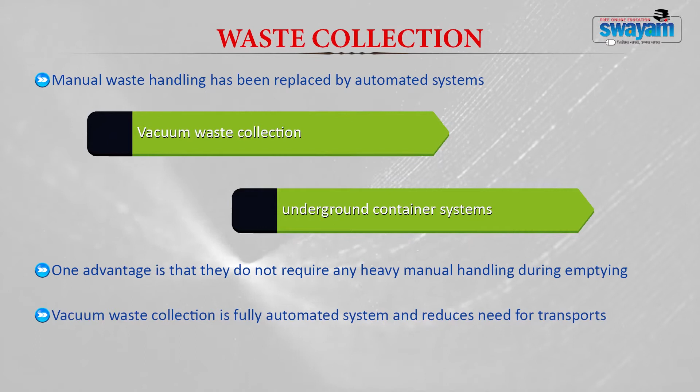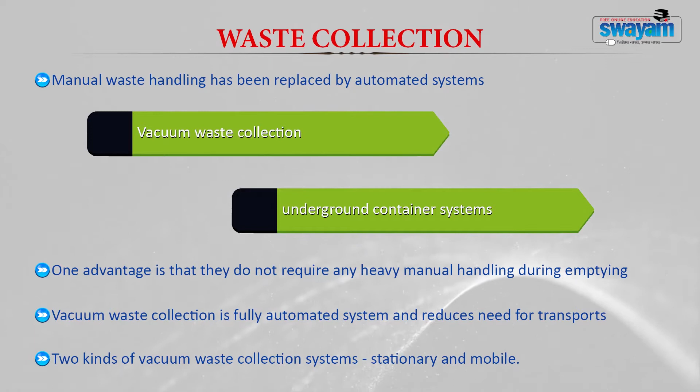Manual waste handling has now been replaced with automated systems. These systems involve the vacuum waste collection system and the underground container system. The advantage of these systems is that they do not require any manual handling during emptying. The vacuum waste collection system is fully automated and generally reduces the need for transport. Two types of vacuum collection systems are involved: the stationary collection system and the mobile collection system.

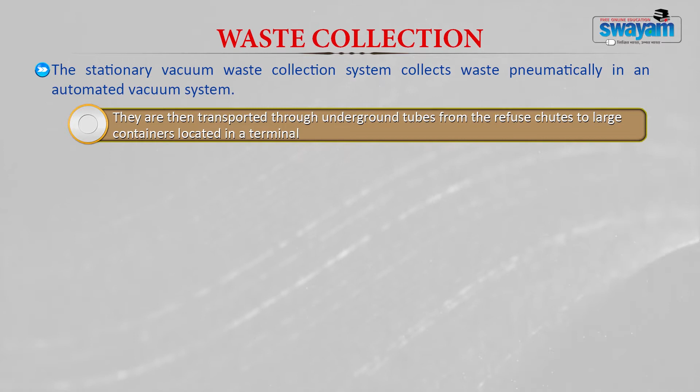The stationary vacuum waste collection system is a system where waste is collected pneumatically in an automated vacuum system. Further, it is transported through underground tubes from the refuse chutes to a large container, generally located in a terminal. From there, the containers are lifted by a hook loader vehicle.

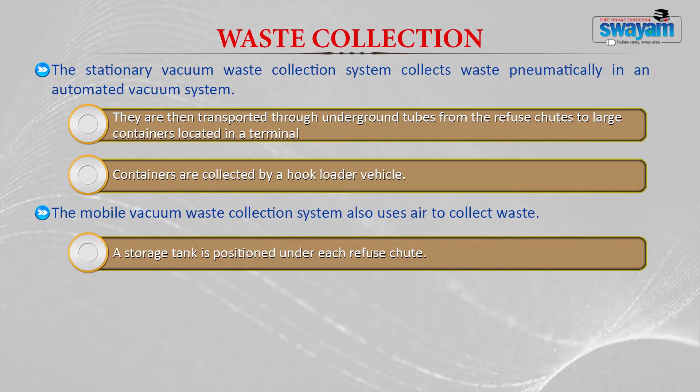The mobile vacuum waste collection system, on the other hand, uses air to collect the waste. Here, the storage tank is positioned below or under each refuse chute. The tanks are further connected to a docking point, which is a place where the collection vehicles come and collect them. At the docking point, the waste is collected through an underground system of tubes.

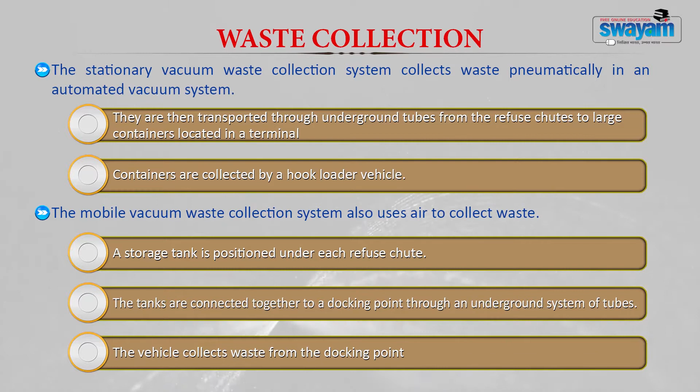The second type of advancement in waste collection is the underground container system. These are fast growing collection systems, more commonly used especially in the developed world like European countries, particularly Sweden. They are generally placed underground, and since they are placed underground, they reduce the need for space at the street level. Normally, all the dustbins or storage bins for collecting waste are placed on curbsides, alleys and parkways, but these underground containers save that street-level space.

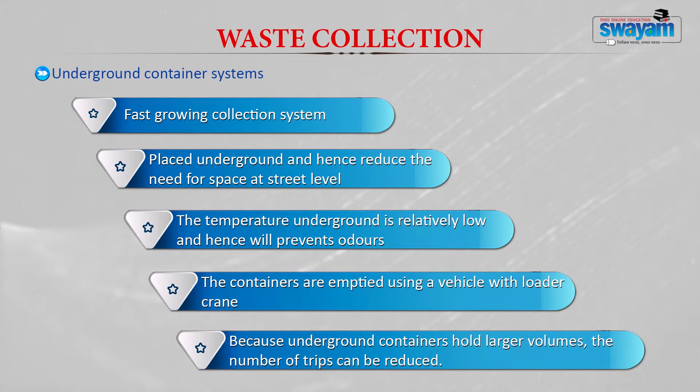The temperature underground is comparatively lower than the outside environment, which also prevents the generation of odor. The containers are emptied using a vehicle with a loader crane. Since the underground containers hold large volumes, the number of trips can also be reduced, which is not the case with storage bins placed in curbsides, alleys or parkways.

The second advancement in recent times is recycling centers. Recycling centers are very popular and are established to collect bulky waste. Sweden is again an example of such recycling centers, though it is also becoming popular in other developed countries, and even developing countries have started establishing these recycling centers.

Recycling centers can be unmanned or manned. Manned means a person is involved in collecting the material, while unmanned is all automated. In an unmanned recycling center, households or persons from the residential area can leave their waste on their own. The people bringing waste to the unmanned recycling center must have a driving license and must have completed a short-term training program in sorting.

In addition to these recycling centers, there are also certain mobile recycling centers. These mobile recycling centers have become very popular, especially for the collection of hazardous waste, some bulky waste, and WEEE, which stands for Waste Electrical and Electronic Equipment.

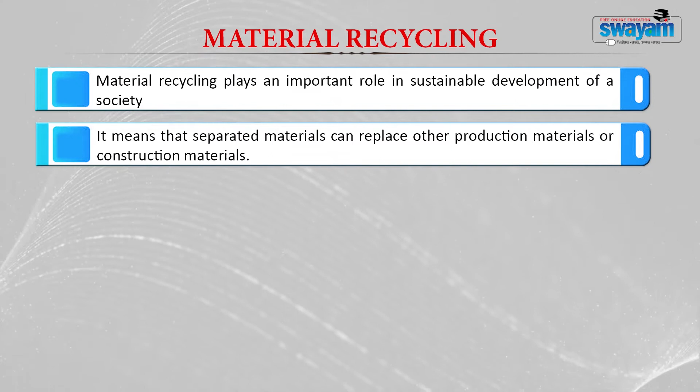The material recycling generally plays an important role in the sustainable development of a society. It means that the separated materials can replace other production materials or construction materials. What will happen by doing so is it will reduce the consumption of virgin material, I mean the new resource consumption will be reduced. Also, it will lead to saving energy.

Now, many developed countries collect this packaging material and paper through manned and unmanned recycling stations that are generally owned by the producer. That means, the manufacturers should have these recycling stations, and again, as I told you earlier, it can be manned or unmanned.

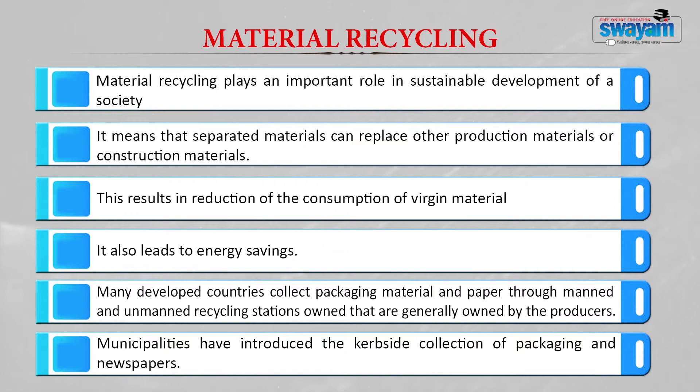Also, certain municipalities have started introducing curbside collection of packaging and newspapers. On the curbside, you can have certain collection units where everyday packaging material or newspapers can be handed over to these municipalities so that they can be taken for further recycling. So, this again becomes part of your material recycling.

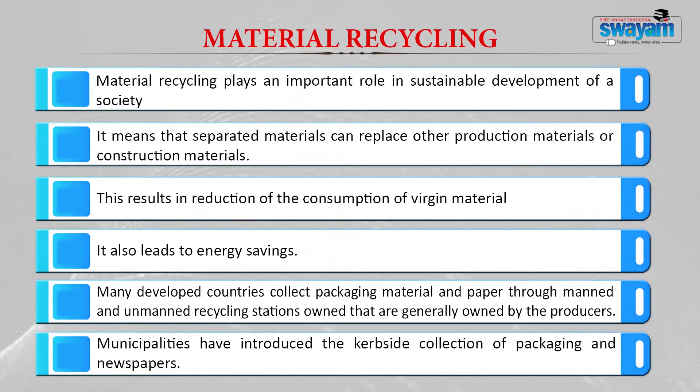Also, many developed countries have used an optical sorting system. Now, optical sorting system is one of the recent systems where you use infrared radiations to sort out the materials, especially used for polymers. They have incorporated this optical sorting system for sorting the waste collected in different color coded bags.

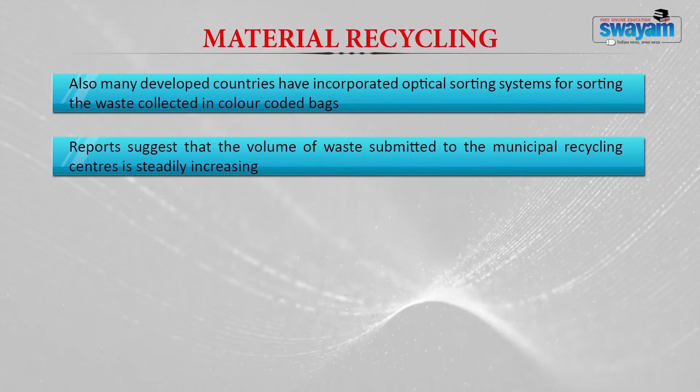Now, various reports suggest that the volume of waste that is submitted to any of these municipal recycling centers is continuously increasing. That means people have taken it as a positive approach and are continuously giving up material for proper recycling. So, if this is the case, then the problem of waste being dumped into an open area can be reduced.

Now, under material recycling, construction waste can also be used. Generally, construction waste can be brought to a common point, refined, and then reused. If the material is made up of different constituents, then it can generally be subjected to the energy recovery option.

Likewise, when you talk about scrap metals, when cars and similar items are crushed, they result in scrap material. Now, these scrap materials can be inspected, sorted, and reused. Based on the nature of the metal, they can be fragmented and used for the production of new products at the steel and metal works.

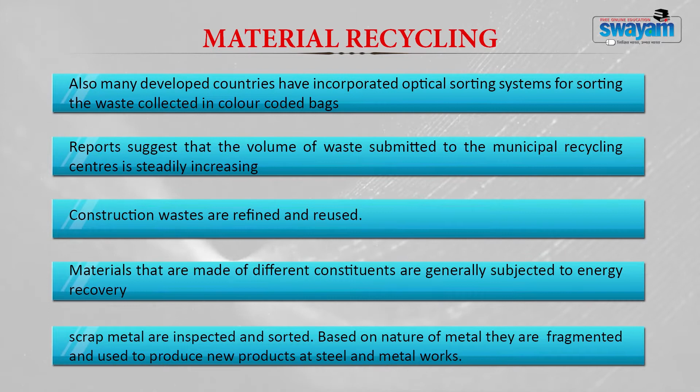Now, this is also applicable for wood. Wood can be pure wood, painted wood, or pressure impregnated wood. The untreated wood can just be shredded and used in the manufacturing of a chipboard, or it can be burned or used as a biofuel. Painted and pressure impregnated woods are generally processed in special incineration plants for the destruction of hazardous waste material present in this painted or pressure impregnated wood. Then later, energy is trapped from this and converted into electricity.

Now, plastics and glass can also be recycled as part of material recycling. Plastics and glass can undergo a number of multiple recycling cycles, but that depends upon the constituent of material which is present there.

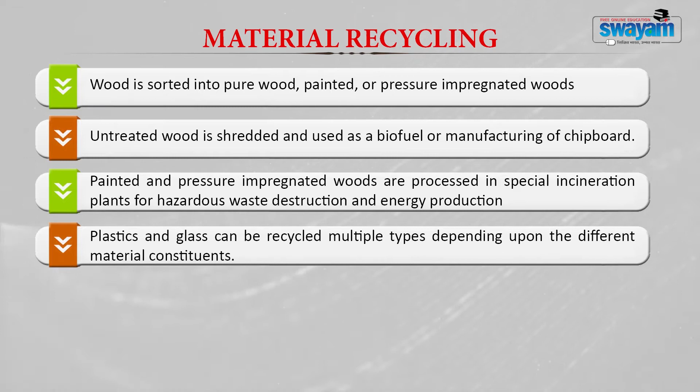If the polymer or the glass is pure, I mean not contaminated, then you can subject them to multiple recycling. Examples are your PET bottles, PET polymers, PE, polyethylene, HDPE, high density polyethylene. These polymers can be easily recycled, but these packaging materials are difficult. Now, if you see among the plastics, packaging materials are more when you compare to these materials like your PET, PE, HDPE. Their recycling is very easy.

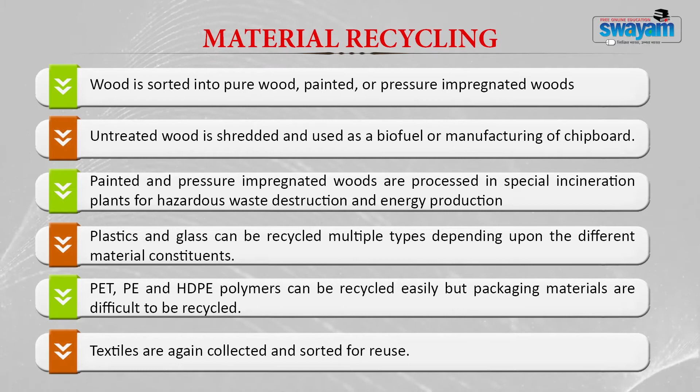Now, plastic pollution is generally created by the packing materials. So, packing materials are difficult to be recycled. Same is the case for textiles, where they are only collected and sorted for reuse. The other treatment is just under research phase. Now, when these packaging materials cannot be recycled, you should find an alternate option.

So, with plastic pollution becoming a great menace in recent times, scientists have found a way of using these plastics in constructing roads. The plastic waste items can be used for road construction, including your plastic carry bags, plastic cups, packaging materials, the wrappers which come around potato chips, biscuits and chocolates; these can all be used for constructing your roads.

For the construction of roads, the plastic should be shredded and then added to an aggregate mixture. This aggregate mixture consists of stone and other materials, and it is generally preheated at 165 degrees Celsius. Then the mixing of the plastic with this aggregate material is done in a mixing chamber for around 30 to 60 seconds till an oily layer gets coated on the plastic material. Subsequently, bitumen is heated at 160 degrees Celsius and mixed with the plastic aggregate mixture. Further, this mixture will be used for road laying using a bulldozer.

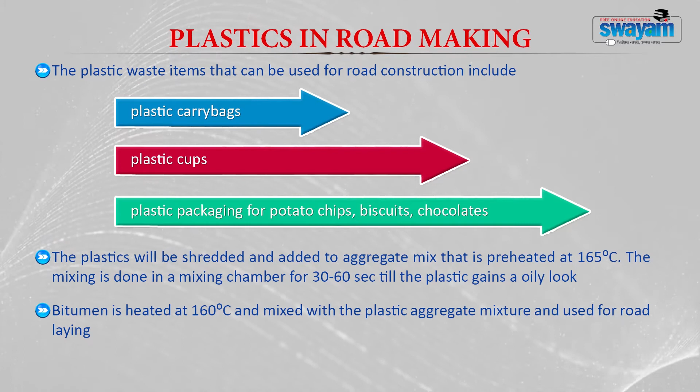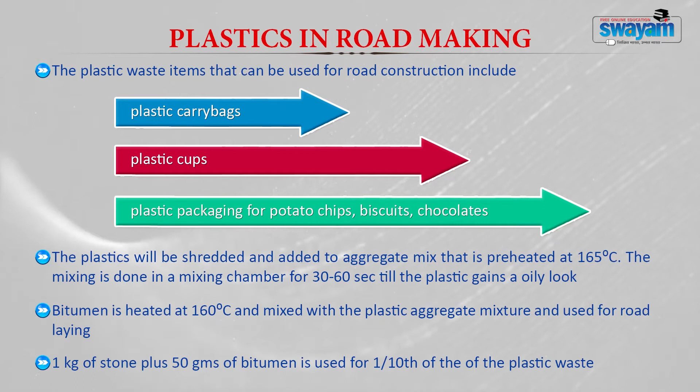Approximately, 1 kg of stone plus 50 grams of bitumen is used with 1/10 of plastic waste for road construction. Now, the advantage of using plastics in road construction: first, the packaging material which is creating a lot of mess and which cannot be recycled can be used here. So, as a result the plastic pollution can be reduced.

Then it is very easy, you do not need any machinery, and it improves the flexibility of roads. Further, they also decrease the wear and tear of roads. The plastic waste increases the strength of the road and reduces the road fatigue. The roads become more resistant towards rain, water and cold weather conditions.

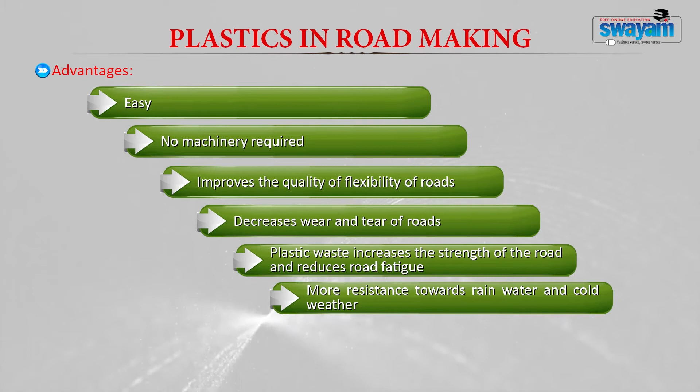Further, the same scientists have also used plastic in making a block. It's called a plastone block. A plastone block is generally made of a mixture of waste plastic and stone. It has been found to withstand great pressure, and it also resists water percolation. Around 300 plastic bags and 6 PET bottles can be used to make one plastone block. Now, this is one aspect of how plastics are used for road construction.

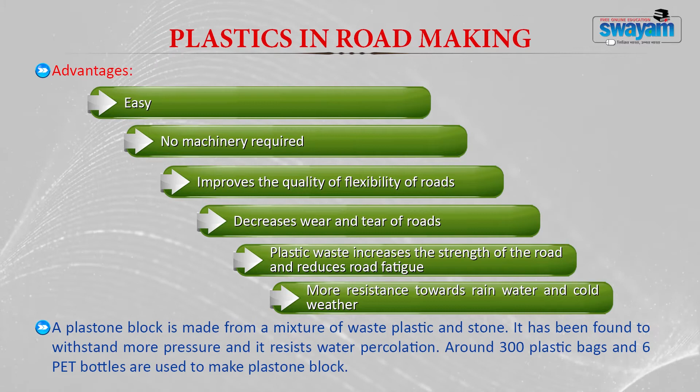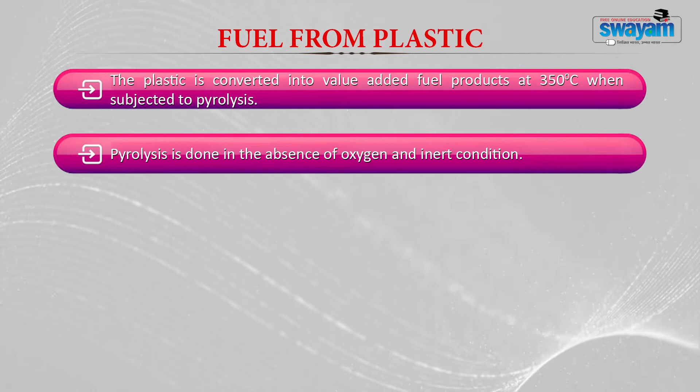Another way by which plastic pollution from packaging material can be reduced is using it for generating fuel. The collected plastic or packaging material will be converted into value added products at a temperature of 350 degrees Celsius when subjected to pyrolysis. Now, what is pyrolysis? Pyrolysis is a process done in the absence of oxygen, in inert condition, at a temperature of 350 to 650 or 850 degrees Celsius.

During this process, it produces 3 different products: solid, liquid and gaseous. For solid, coke is produced; for liquid, gasoline, diesel, kerosene and lube oil are produced; and gaseous fuel is produced. These liquid materials are separated by fractional distillation.

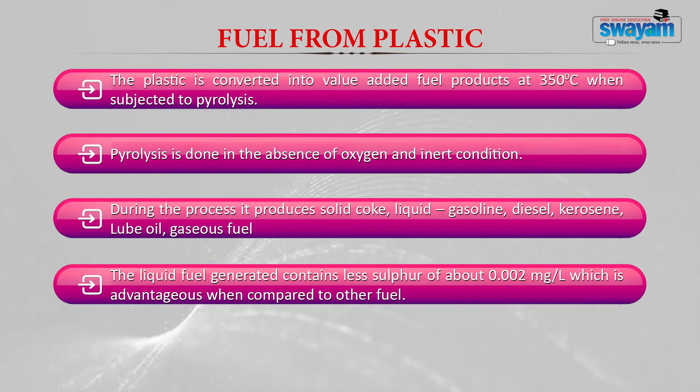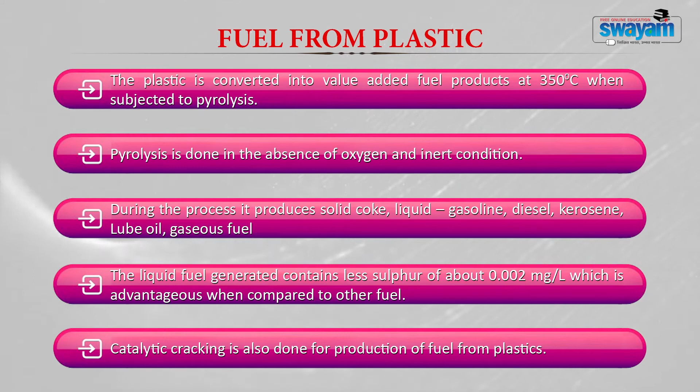Generally, the advantage of the liquid fuel generated by pyrolyzing plastic is that it contains very little sulfur, around 0.002 milligram per liter, which is advantageous compared to other fuels, because diesel contains more sulfur. When there is more sulfur during combustion, sulfur dioxide gas is released, causing air pollution. Also, for cracking the plastic polymers, you need certain catalysts. Catalytic cracking is also done for the production of fuel from plastics.

Researchers from Swansea University have identified a way to generate hydrogen fuel from plastic waste. Here they use a light absorbing photocatalyst which has the potential to absorb sunlight and transfer it into chemical energy by a process termed photoreforming. This catalyst will be added to the plastics and exposed to sunlight under alkaline conditions.

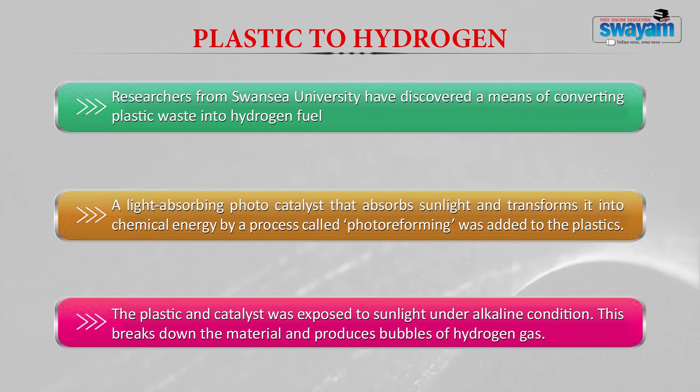At this condition, the material will get broken down and it will generate a lot of bubbles of hydrogen gas. Now, this is still under the research phase. They are just trying out to produce hydrogen.

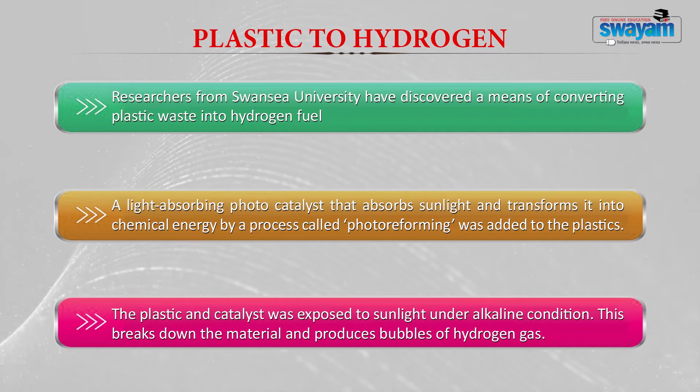The other advancement that has come in the field of solid waste management to handle the waste properly is the extended producer responsibility, in short called EPR. Now, it is a strategy that is used by many of the industrialized nations to promote reuse, recycling and environment friendly disposal options for waste.

Now, the extended producer responsibility generally assigns responsibility of disposal of the waste to the manufacturer of the goods. Here the government is not involved, the manufacturer is held responsible for proper disposal of the waste that he generates. Again, it ensures a closed loop approach where the waste that is generated from the product must be used to produce another product. This is again an added advantage of EPR.

Now, the extended producer responsibility also ensures that the price of the product includes the cost of disposal. I mean whatever cost the company or the manufacturer would spend on the disposal of these materials will be included in the price of the product. Also, this extended producer responsibility protects the environment from much of the impact, and the cost of production of new products will also be reduced.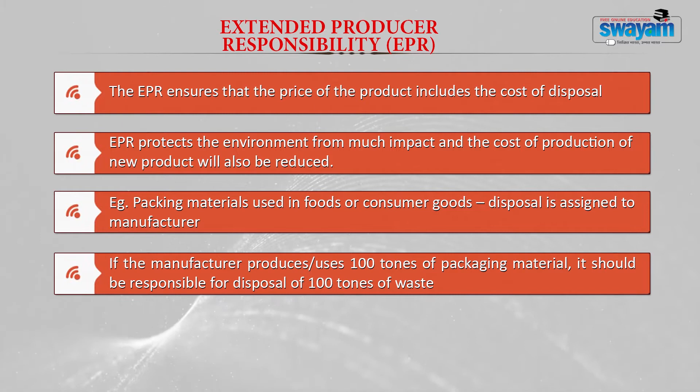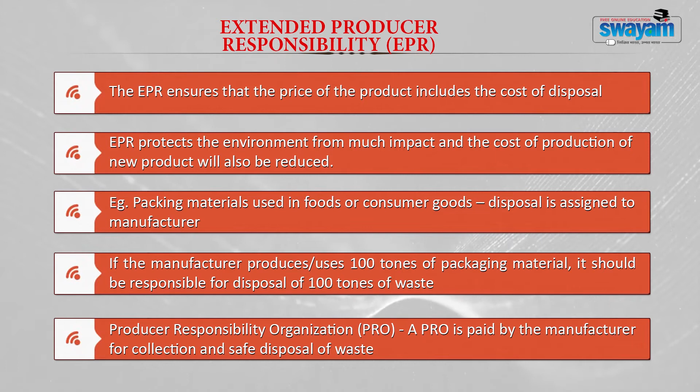Now, an example is the packaging material used in food or consumer goods, which should be disposed of by the manufacturer. If the manufacturer is producing 100 tons of packaging material, then he should be responsible for disposal of this 100 tons of waste. Another feature of this extended producer responsibility is the producer responsibility organization, termed PRO. A producer responsibility organization is paid by the manufacturer for collection and safe disposal of waste.

Now, when a manufacturer takes the responsibility for the recycling of their own products, they should use environmentally safer materials in the production process. Also, they should consume fewer materials in the production process. This will reduce the use of new virgin resources. Then they should also design the product in such a way that it lasts longer and is more useful on a longer scale.

Further, they should create a safer recycling system. Also, they are motivated to keep the waste cost down. Now, no longer is the government or the taxpayer responsible for the cost of disposal. The EPR ensures that the cost of disposal is borne by the manufacturer.

What are the changes or the advancements that have come in the legislation of solid waste management with respect to the Indian rules? In the previous module we discussed a number of waste management rules. If you see, all the older waste management rules have been revamped with new rules in the year 2016, like the solid waste management rules 2016, hazardous waste rules 2016, plastic waste rules, e-waste rules, construction and demolition rules, biomedical rules; all have been revamped and new rules have been framed in the year 2016.

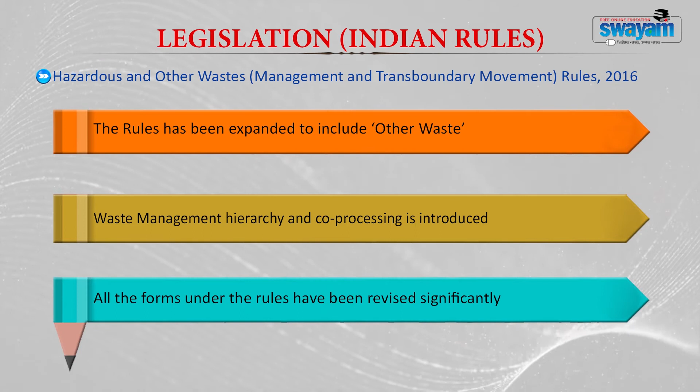Now, the hazardous and other waste management and transboundary movement rules 2016 talk about the inclusion of other waste. Previously, other waste was not included. Now, the term other waste is included in this rule. Also, they talk about the waste management hierarchy and co-processing, which is introduced in the rule. All the forms have been revised significantly. The biomedical waste management rules 2016 have been expanded to include vaccination camps, blood donation camps, surgical camps and other healthcare activities.

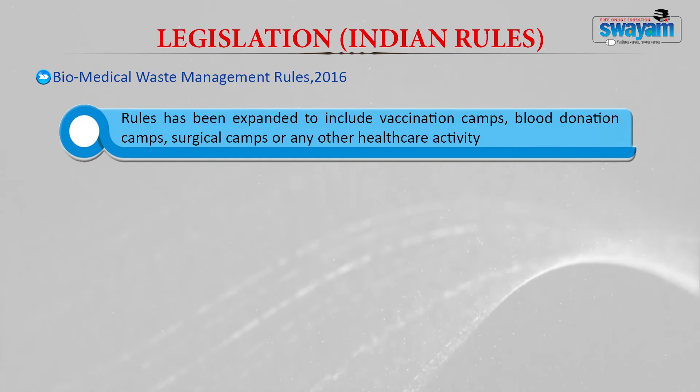Also, they have suggested to phase out the use of chlorinated plastic bags, gloves and blood bags within 2 years' time. They have suggested pre-treatment of biomedical waste like the microbiology waste, blood waste and things like that. Also, they have ensured to provide training and immunization to all healthcare workers.

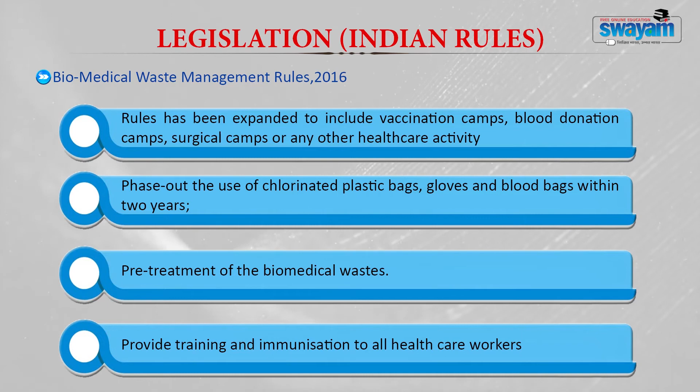Further, they have also suggested to establish a barcode system for the bags or containers that had been used for disposal of biomedical waste. In the previous rule, the biomedical waste was classified into 10 categories. Now, they have reduced it into 4 categories. No occupier shall establish an on-site treatment and disposal facility if there is a common biomedical facility available within 75 kilometer distance.

Now, the plastic waste management rule signifies that the plastics that are produced should be of a minimum thickness of 50 microns and it should not be less than this. This is generally to promote or facilitate proper recycling. It also talks about the usage of plastics in road construction as per the Indian Road Congress guidelines. And also they suggest energy recovery from plastics in the form of waste oil.

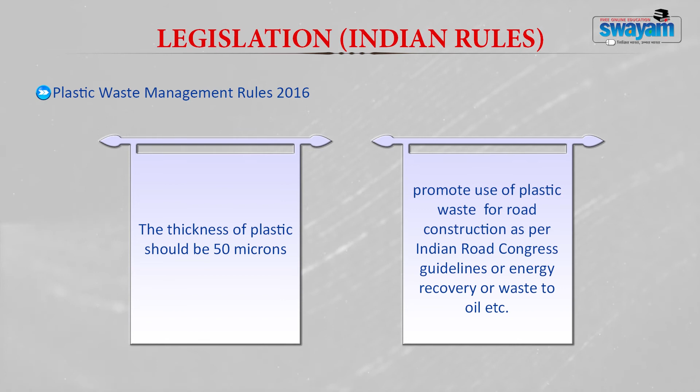Likewise, the e-waste management rule 2016 talks about the involvement of manufacturer, dealer, refurbisher and Producer Responsibility Organization, the PRO, to be introduced as an additional stakeholder in the rule. Also, the applicability of the rules has been extended to the components, consumables, spares and parts of EEE in addition to the equipments which are listed in Schedule 1.

They also talk about the compact fluorescent lamp, I mean the CFL, and other mercury containing lamps which are brought in under the purview of these rules. A collection mechanism based approach has been adopted to include collection center, collection point, take back systems for e-waste by producers under extended producer responsibility. The e-waste rule 2016 also talks about reducing the use of hazardous materials in the electronic goods.

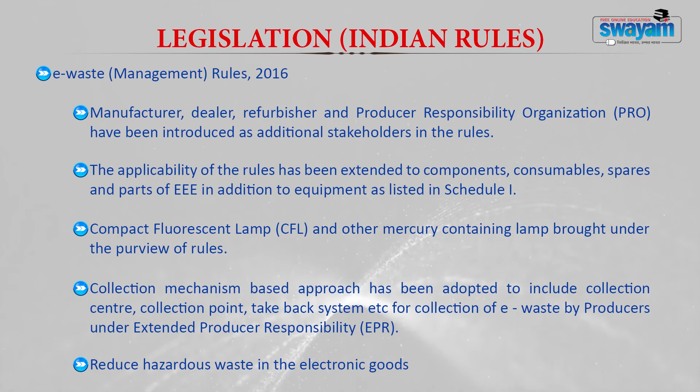One of the biggest advancements in terms of solid waste management that has been done in India is the Swachh Bharat Abhiyan or the Clean India mission. Now this Swachh Bharat Abhiyan you must have studied in our previous modules. It is a nationwide campaign in India which aims to clean the streets, roads and various infrastructures of the Indian city, town and rural area.

Now this mission has two thrust areas. One is Swachh Bharat Abhiyan Gramin or rural, which focuses on the rural region and it comes under the Ministry of Drinking Water and Sanitation. They focus on the sanitation aspect and control of open defecation in the rural areas. Also they focus on the solid and liquid waste management. The other thrust area is the Swachh Bharat Abhiyan Urban, which comes under the Ministry of Housing and Urban Affairs. This again deals with the solid and liquid waste that is generated in the urban areas.

To summarize, in this module we have discussed the various advancements in the field of solid waste management with respect to waste collection, where we discussed the vacuum collection system and the underground container system. Then we discussed the establishment of recycling centers, which are operated as manned and unmanned recycling centers for the collection of various materials for recycling. Then we discussed material recycling: the construction waste, the wood waste and other plastic and paper waste.